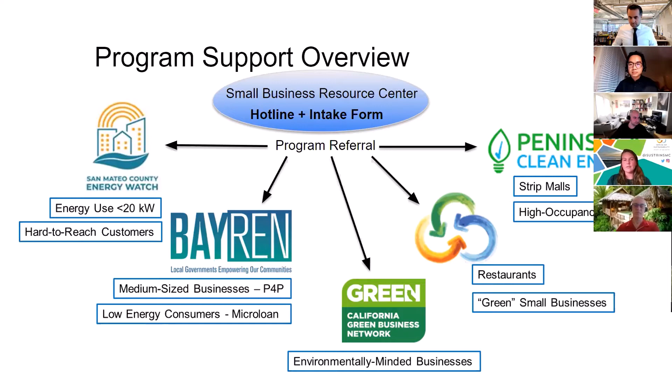Next slide, please. The first program I'm going to touch on today is San Mateo County Energy Watch, which is the program that I personally am managing currently. I coordinate this referral-based program connecting businesses with contractors, technical and financial assistance to work on energy efficiency and electrification measures. Specifically, our program is able to provide benchmarking and energy rate analyses, looking at the customer's current energy uses and seeing how we can improve upon them, whether through a remodel, installation of new equipment, replacement on burnout, or even planning for future construction.

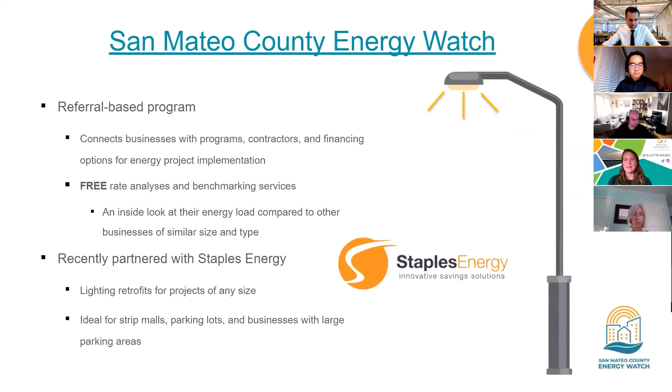In addition to this, we've partnered with many programs, one of which being Staples Energy. So if you're looking for lighting measure support specifically, this is a really great option. In many cases, think strip malls or other areas that have large energy consumption from light bulbs, especially those that are not efficient. Staples is a great partner here. Next slide, please.

Second, we have our Green Business Program. This is a much more holistic look at a business. They are able to work with small businesses throughout all categories of sustainability, through water, waste reduction, energy efficiency, etc. So what they're able to provide is consultation services for businesses who are looking to become more green and who have that green ethos at heart. If you know of a business or you're working with a business currently, or maybe looking for new construction for a business, this is really the best program for you, I believe, because they're able to look at the whole business as opposed to just one component.

Right now, they're also able to offer a few incentives. We are also working on a water incentive, which is very exciting, but not quite finalized yet, so unfortunately I can't announce or confirm that officially. But regardless, you are able to get businesses certified through the Shop Green app, which is really desirable right now, especially as businesses are trying to come back into the ring. After the past year, a lot of small and medium businesses have faced economic hardship, so this is a great way to get free marketing in addition to reducing their green footprint.

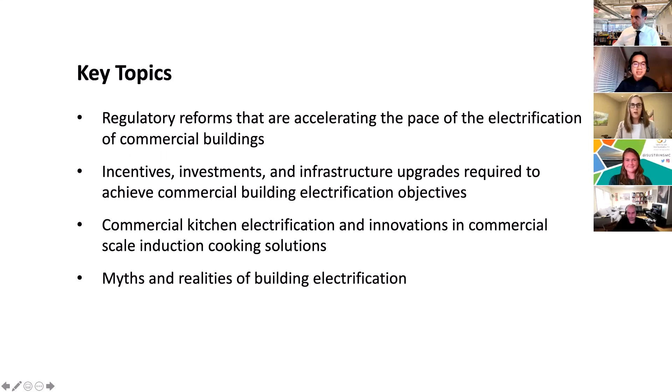So first, a little bit more about BDC. Kenny mentioned the Building Decarbonization Coalition is a diverse coalition of about 300 stakeholders, including builders, designers, manufacturers, local governments, state governments, NGOs, community-based organizations, all working together as a coalition to chart a safe, rapid, and equitable transition away from the use of fossil fuels in buildings.

And we use a 5-pronged strategy, which is really focused on stopping gas subsidies, phasing out the use of gas in all buildings, phasing out the sale of gas appliances, investing heavily in equitable electrification, and then decommissioning gas infrastructure and reinvesting those investment dollars into ensuring a just transition for impacted workers.

And a little bit about me, a little bit of real talk. I've been working in the climate field for about 30 years, as Kenny mentioned in his generous introduction.

I started off in the utility regulatory space in California, moved over to the international space and designed renewable energy off-grid systems, came back and went hyper-local and worked for a city and then worked across cities. So I consider myself a pretty climate-educated person.

This is my roof. This is my son plugging in our EV. We have weatherized our home. We've installed highly efficient windows and doors, smart technologies, and I'm a proud dark green member of Clean Power SF here in San Francisco. But here's where the real talk comes in.

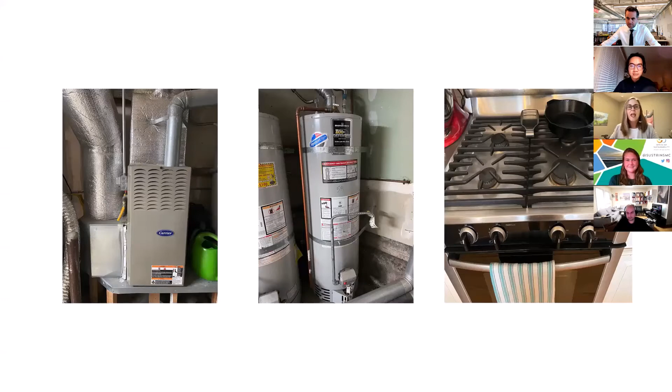This is my furnace, this is my water heater, and this is my stove, all gas. And I tell you that not to publicly shame myself, but I really think that I'm like a lot of the general public out there that either hasn't known about the significant climate, health, and safety issues associated with natural gas, or wanted to change out of my dirty appliances into clean ones, but either couldn't afford to or had other competing economic priorities, or like me, has really felt kind of stuck with my old, dirty, inefficient gas technologies, and I haven't really wanted to deal with the hassle of replacing them.

So we are going to talk about why it's important to convince people and to make it convenient and easy and affordable for them to do exactly what I am just about to do. So that picture is going to hopefully look very different in about 6 months.

So what we're finding now with all of our work to get rid of coal plants and to reduce emissions from vehicles, is that emissions from natural gas is now the fastest growing climate pollutant in the world. Burning natural gas in commercial and residential buildings accounts for more than 10% of US emissions.

And the term natural gas, I want to address that really quickly. It's the result of a 1930s gas industry marketing campaign. It's a pretty amazing campaign, really, to give the impression that their product was cleaner than fossil fuels, but it's very much a fossil fuel.

And the United States is the largest consumer of natural gas in the world. We're ahead of Russia, we're well ahead of China. Natural gas is extracted all over the United States. The US is the second largest exporter of natural gas in the world behind Russia. And natural gas is produced in 32 states, mostly in Texas, Oklahoma, New Mexico. And California is the second largest consumer of natural gas in the country, second only to Texas. Two-thirds of our households use natural gas for home heating and cooking.

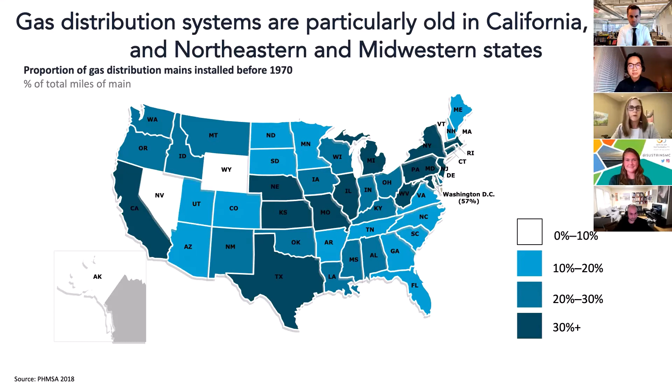Now, in California, many of our communities, as you well know, I'm sure, rank the highest in the United States in terms of poor air quality. And that's during normal times, not even during wildfires. And we're seeing that while we're making good progress on power plants, reducing emissions from power plants, and reducing smog-causing pollution from vehicles, we're way behind on buildings.

The current state of air quality problems in California is that the gas we are producing in buildings is producing 6 to 7 times more smog-causing pollution than power plants, and twice as much as all of the cars that are on the road driving around the state.

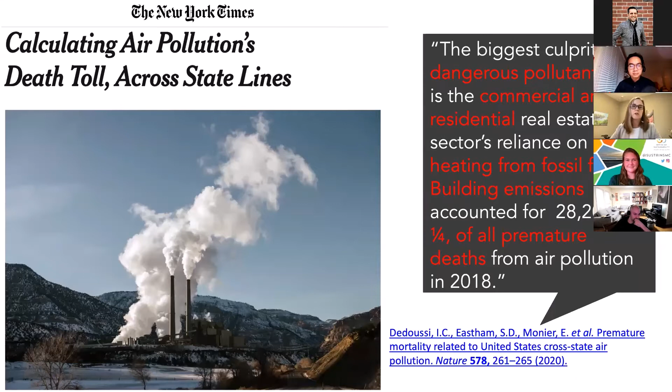We're seeing this around the country. This is from a New York Times article about a study released in 2020 on the biggest culprits of premature death from air pollution. What they found was that the largest source of premature death from air pollution is now burning fossil fuels for heating in buildings. A quarter of all premature deaths from air pollution comes from emissions from the gas we're burning in buildings.

When you burn gas, you release some pretty serious, dangerous toxins. The three main ones are nitrogen oxides (NOx), carbon monoxide, and formaldehyde. Nitrogen oxides are the main concern, and the federal EPA has tried to reduce NOx for many years because they're so damaging—they decrease lung function and cause respiratory problems like asthma, especially in children. Carbon monoxide is deadly; that's why we're required to put carbon monoxide sensors in all our homes, yet it's coming out of our kitchens. Formaldehyde is one of the leading causes of childhood leukemia and other cancers.

This is what happens when we cook with gas in our kitchens. A study done by Lawrence Berkeley National Labs in 2014 examined 60,000 homes in California and found that in half of those homes, within 2 minutes of a gas burning stove being on, they exceeded the 1-hour federal legal limit of exposure to these pollutants.

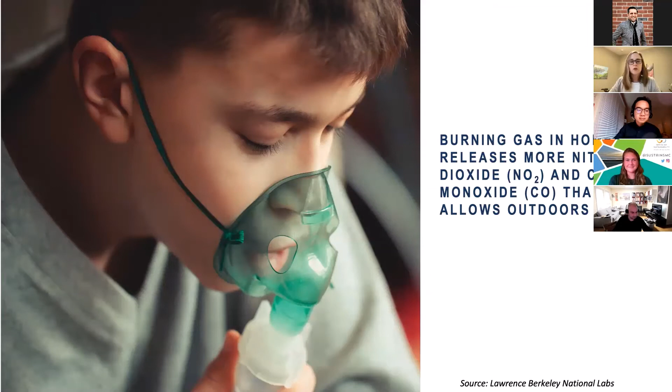A similar study was done more recently by the Climate Council in Australia, which found earlier this year that a child living with gas cooking in the home faces a comparable risk of asthma to a child living with secondhand smoke in the home. Households that cook with gas were 32% more likely to develop asthma than those without gas cooktops. This has a profound impact on childhood and family health, and also on inequities and injustice, because we know higher pollution levels are usually found in older, smaller, less ventilated homes—typically found in lower income and BIPOC households and communities.

So let's talk a little about the cost of gas. Climate policies are already starting to drive a drop in gas demand—it's slow, but we're starting to see it. We know that gas infrastructure financing works by having gas utilities and pipeline companies put the infrastructure in the ground, and then we as ratepayers pay for it. So there are fixed costs being allocated to all of us as ratepayers.

As more buildings are electrified and there's less demand for gas, there will be fewer customers left on the gas system to pay for those fixed costs, or stranded assets—leading to higher gas rates. As we deal with aging gas infrastructure to avoid things like the explosion in San Bruno, increased safety regulations also lead to additional higher gas costs. Those higher rates make electrification even more economically attractive, and more people choose to get off the gas system and onto electric, which leads to even less gas demand, higher prices, and so on.

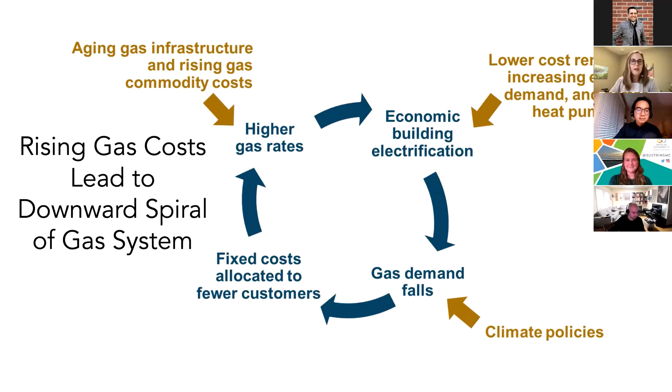This slide shows the average costs that we've gotten from filings at the California Public Utilities Commission of piping gas infrastructure to the home, plumbing that gas around the home, and then installing the ventilation systems to get the pollutants out and into the atmosphere. And so it's about an average of $7,000 per home to install gas infrastructure in a new home.

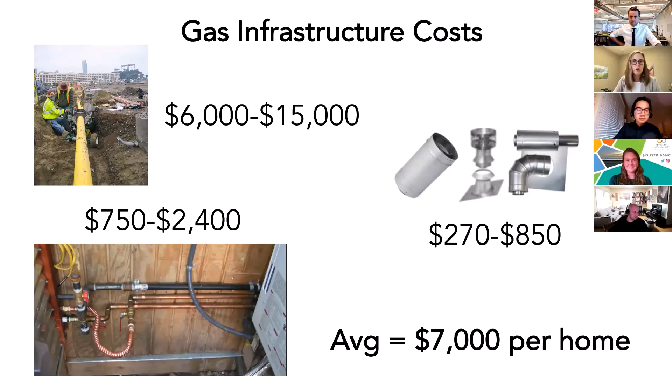And the National Association of Home Builders puts out a report every year that looks at the impact of every $1,000 of increased cost that we spend to build housing across every major metropolitan area in the country, and how many families that prices out of the ability to afford a home within that jurisdiction. In 2020, they found that for every $1,000 of increase in housing costs, you price out 160,000 average households from being able to afford to purchase that home.

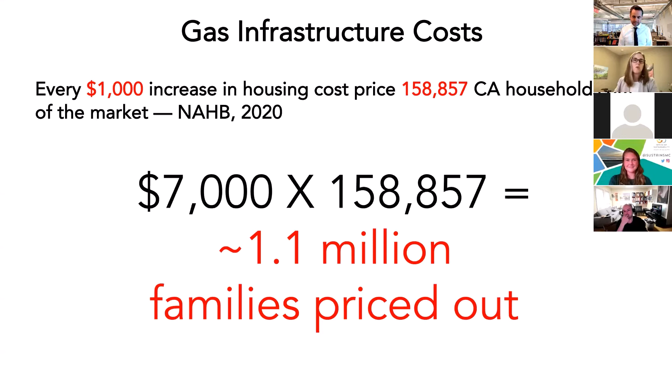So if you take their numbers at the low end of what it costs to put gas infrastructure into a new home, about $7,000 per new home, that's more than 1 million families that are being priced out of being able to afford that home because of the choice to build that home with gas.

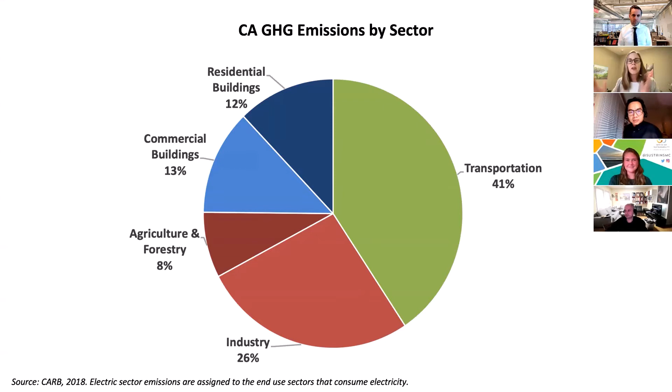So what do we do about it? Commercial buildings comprise 13% of California's emissions footprint. The state, as you know, is putting in a lot of policies and incentives to reduce transportation emissions. We don't yet have a lot of great technological options for decarbonizing industry and agriculture, so we may need to preserve our remaining fossil fuels for those sectors, but we have excellent technologies available to us today that we can use to decarbonize buildings. So we do have technologies available that can help us electrify all of these end uses. I'm going to focus today on the big ones: space heating, water heating, and cooking.

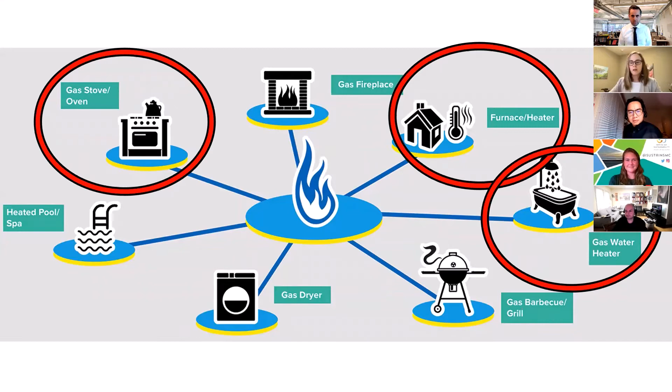So here are some of the barriers to electrification. You know this because you're talking to your clients and your customers about why they should electrify. And here's probably what you're perceiving and what they're saying back to you. Space and water heating are responsible for about 70% of direct fuel use in commercial buildings. So those are the big ones. The rest is cooking and other uses.

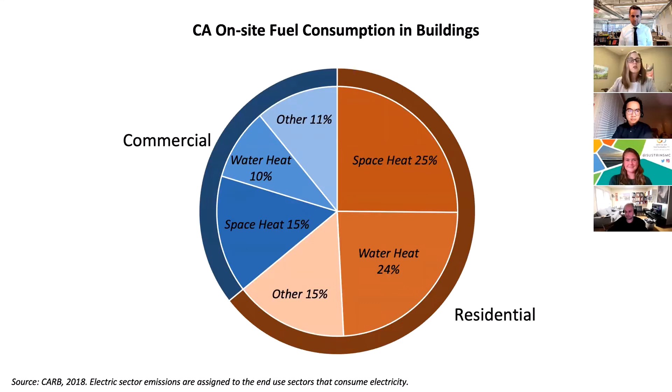93% of commercial buildings use non-electric heating fuel. It's the primary source of emissions for those uses in commercial buildings. And while emissions from fuel combustion in residential buildings in California fell 18% between 2000 and 2016, combustion emissions in commercial buildings actually rose 9%. So we have to deal with this.

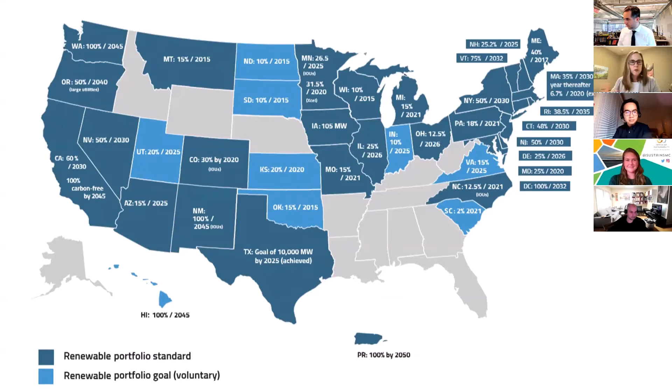And so here is where we're starting to see an increasing amount of renewable electricity from on the grid in these states. The darker the state, the higher the level of commitment. As you know, California has committed to the most aggressive renewable portfolio standard, 100% by 2045. Washington State is the same. And the lighter blue states are lower commitments, but they're still starting the process of moving toward a cleaner grid.

Many of you are already designing for this equipment in your buildings and projects, and some of you are engineers who know this technology better than I do, but let's talk quickly about how a heat pump operates.

It operates much the same way as a refrigerator, just in reverse. It uses a compressor with a refrigerant and transfers heat from one location to another. In a refrigerator, it transfers heat from the air inside to the outside. If you put your hand on the back of your refrigerator where the coils are, you'll feel the heat. That heat used to be inside, and the heat pump is taking it outside.

The same can be done to heat and cool air and water. A heat pump water heater, even in below freezing temperatures, can still extract heat from the air outside the tank of water and bring it into a heat pump space heater or water heater. This can be done in a unitary system like in your home, or in a centralized system like in an office building.

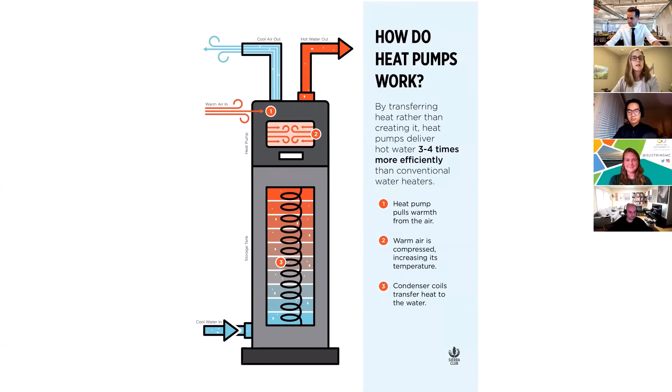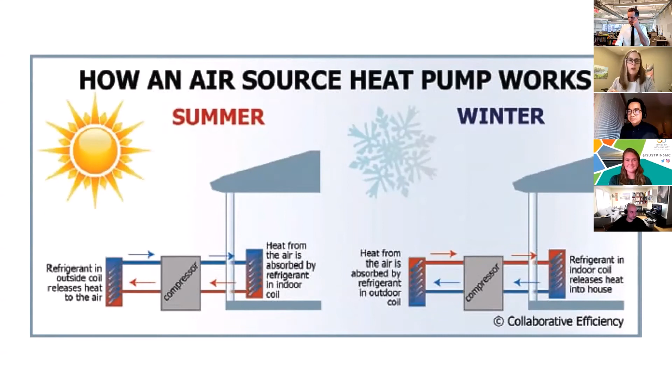The same technology can be used in reverse—it's basically an air conditioner that can run in both directions. Modern designers are really starting to look at heat pumps as the high-tech systems, the future of what heating and cooling should look like in buildings, and our traditional AC systems as old, kind of Soviet-era systems that are becoming outdated and will be obsolete.

These systems are incredibly efficient. The beauty of a heat pump is that you're not using a whole lot of energy to actually produce heat—you're just moving it from one place to another, and that's why it's so efficient.

When you look at 1 therm of input from a natural gas boiler, you get 0.8 therms of heating. At the bottom of the screen, you see what you can get when you put in 1 kilowatt hour of input into a heat pump—you can get 3 to 4.5 kilowatt hours of heating. You're not actually producing the heat, you're pulling heat from one area to another, which is why you hear people talking about heat pumps being 300 to 400% efficient. You only use electricity to move heat in the compressor and potentially to run a fan as well.

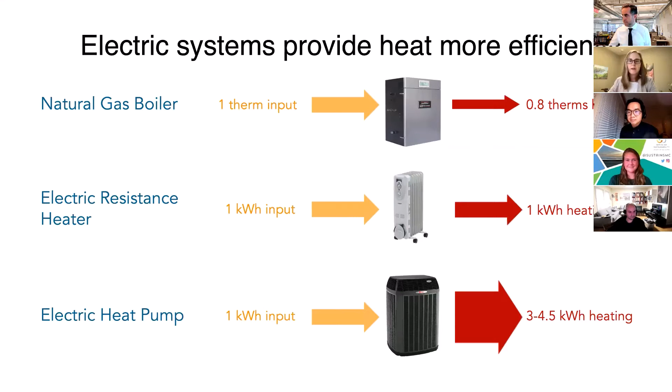RMI did a study of the greenhouse gas impact of switching water and space heating from gas to heat pumps, looking at the average grid mix across the US. They looked at every state, from West Virginia, which is still about 95% coal, to much cleaner states like New York, Maine, and California. What they found was that in every single state, even ones with a dirty electricity mix, there is a greenhouse gas benefit of switching space and water heating to heat pumps rather than running them off natural gas. The darker the blue, the bigger the greenhouse gas benefit.

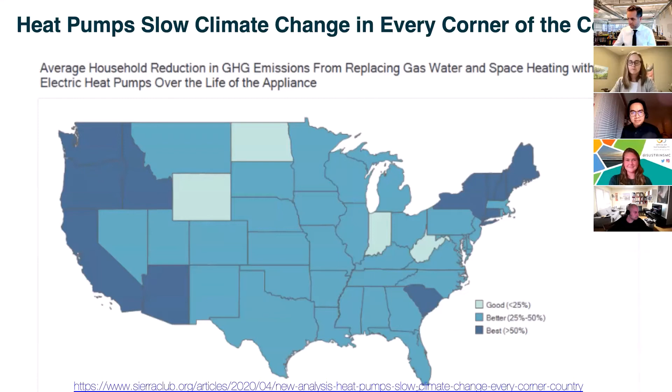In the Northwest, West, and Southwest, you get about a 50% greenhouse gas benefit from switching away from natural gas. But even in dirtier states, like West Virginia, you get a 25% greenhouse gas benefit from switching. Because of this incredible efficiency, even with a dirty electric grid, you still get a greenhouse gas benefit—not to mention an almost complete elimination of nitrogen oxides from your heating.

While space and water heating require the most energy and therefore have the biggest greenhouse gas reduction potential, people generally don't care about their hot water and cold or hot air. They don't care where it comes from as long as it works. But people care very deeply about their stoves, so we're going to talk about induction cooking.

Induction cooking isn't like the traditional electric coil systems you may think of, where you're heating up an electric resistance coil and that coil heats the pan itself. What magnetic induction cooking does is use electromagnetic fields to excite the molecules within the pot itself, and that generates the heat within the pot.

So induction is incredibly efficient. The transfer of energy is about 90% efficient because it doesn't generate any waste heat that goes to the outside of the pot or pan. A best-in-class gas stove gets you about 30% efficiency.

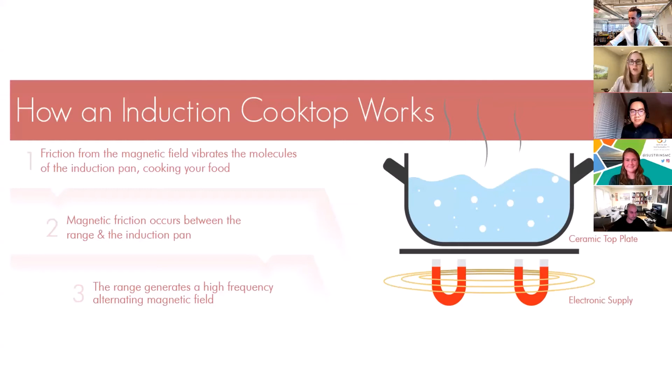It's a massive differential, because 70% of the heat being generated is escaping into the surrounding air. That not only wastes heat and causes more emissions, but also heats up the air in your kitchen. You've heard the expression, if you can't stand the heat, get out of the kitchen—with an induction stove, that expression is no longer valid. In fact, in induction kitchens you sometimes have to heat the kitchen in winter months in cold places because you don't get the heat coming off the stove. That's one of the things professional chefs love about induction cooking—their kitchen is much more comfortable to cook in.

So not only that, it's a better cooking experience. The Sacramento Municipal Utility District, SMUD, did a study with the Food Service Technology Center in San Ramon, and they looked at the two most important aspects of cooking for chefs: power and control. They want to be able to heat up something quickly, and they want to have ultimate control of the food they're cooking. They compared 3 different kinds of induction stoves with 2 electric resistance stoves and 1 top-of-the-line gas stove. The 3 induction stoves are the red lines, the 2 electric resistance stoves are the green lines, and the 1 gas stove is the blue line.

What this chart shows is how long it took to boil about 12 pounds of water, which is about enough to cook pasta for a family of 4. You can see that the 3 induction stoves very quickly got water to the boiling point, anywhere from 9 to 11 minutes. The electric resistance stoves took about 15 to 17 minutes, and the gas stove about 18 to 19 minutes. So both the electric coil and the gas stoves took about twice as long as the induction stove.

You can see that the control of the induction stove is so amazing that you can quickly get that water back down as well, which is important for chefs. So what this is showing you is that induction cooking is about 2 times more powerful, and it gives you about 3 times as much control over how easily you can cook the food.

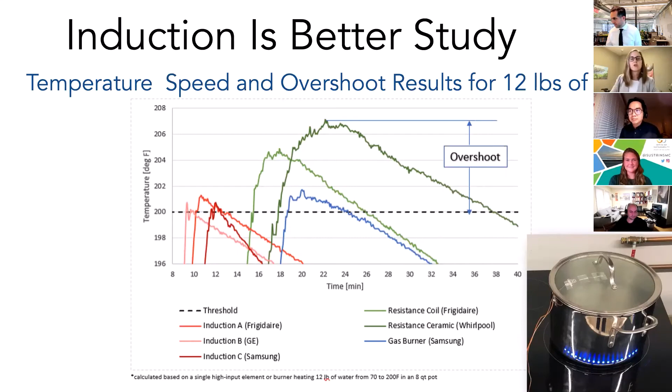Finally, induction is healthier because you're not having any pollution coming off of it, and it's also safer. It's cooled to the touch almost immediately after you cook with it, and so burns are quite rare.

Folks that love induction stoves: Consumer Reports loves induction stoves. In 2020, 6 of their top 8 ranges were induction. And in addition to the power and control, they cited the durability and the ease of cleaning. For those of you that have a gas stove, you know that to clean it, you have to take the grill off, you have to pull the food off, you have to scrub it, you have to put the grills back on. But with induction, all you have to do is spray and wipe the glass surface.

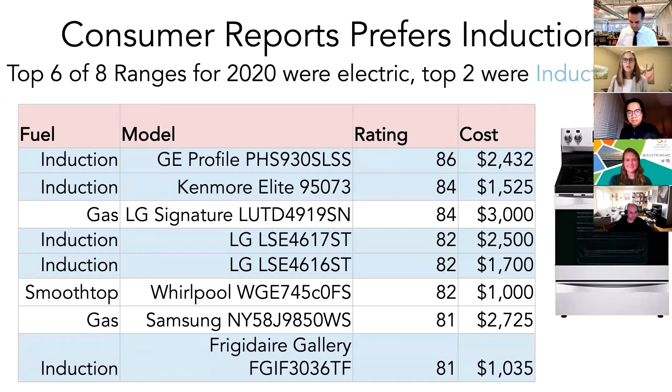More and more high-end restaurants are starting to renovate their kitchens to be all electric, from the French Laundry to Café Ficelle, which has represented the United States in the French baking competition for the last 5 years, to Wolfgang Puck, to Guy Fieri. They're all huge fans of induction. And even the Great British Bake Off, which is my personal favorite TV show, loves induction because of its modularity and its portability. You can buy a portable induction hob for about $100, and you just plug it into any 120 volt, 15 amp electrical outlet.

So I would like to show, if technology allows me, a little bit of a video so you can hear straight from a chef. Let's see if this works.

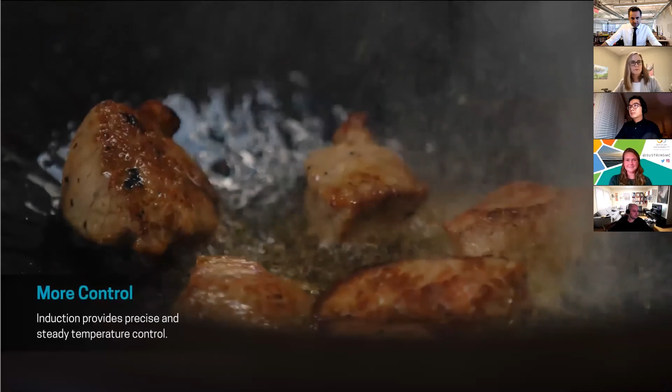I'm gonna saute that with garlic. Turn this on. When cooking with the wok, it's usually over an open flame to create that nice sear, the high heat. But with the induction burner, I was able to set up to the temperature that I want within seconds, and the wok just heat up. That, I was really impressed with. And you see that ready to go, then you just carefully add the meat to sear it. Steak cooks at really high heat, so knowing that I can control the exact temperature and seeing the results, I look at the wok now and I'm like, I wouldn't mind having this at home. The garlic is caramelized. The meat has a nice color. I'll add the onions.

When we're sauteing veggies, you want to stir constantly. Once you see that the vegetable is kind of wilting, that's when you know it's done. That was what, 2-3 minutes, and you have complete lunch or dinner. So now I'll just turn this off, and instantly you can hear it stop cooking. So yeah.

When I was young, I spent a lot of time with my mom in the kitchen. She's been the biggest influence in what I do. I would call her... okay, sorry about that.

So you can see that chefs really like it. There are ways to cook with different styles of food. These are a couple resources that are available, some really great resources. The Food Service Technology Center, especially, offers an induction demonstration program that will demo commercial and residential induction equipment live or virtually for you if you're a developer, architect, builder, etc. They offer great classes. I strongly encourage you to look at those.

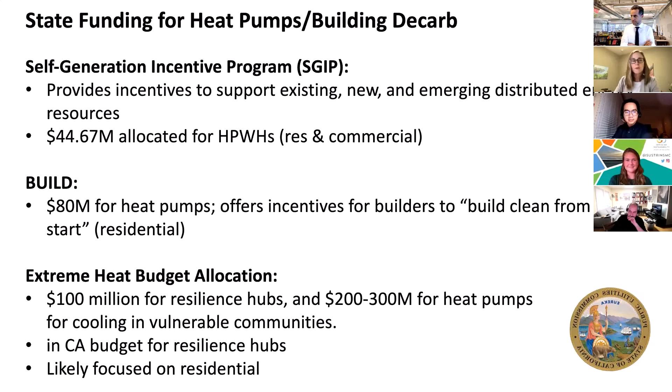Wanted to mention also the new budget that the governor is expected to announce on January 10th includes about $500 million to address extreme heat. We're starting to see this more and more across states and across the country, where people are really suffering because they don't have air conditioning, because they've never needed air conditioning, and now we do need it. So there's a lot of money in the new budget for heat pumps for cooling in vulnerable communities. If it passes, it'll be the largest heat pump incentive program in the country.

So I'm going to end with a couple of building decarbonization myths, realities, and somewhere in between.

Heat pumps don't work in cold climates. This is not true. It is true that early technologies rely on a simple vapor compression cycle and do not perform well under freezing temperatures. But newer products have variable speed compressors, and therefore are pretty capable of performing well below -10 degrees Fahrenheit. This has been tested in Minnesota and other pretty extreme cold climates.

We know that induction is not the same as electric resistance, although a lot of people think it is. Induction doesn't work well with woks - but we just saw that it works quite well, and you can use it for charring peppers and tortillas. There's all kinds of ways you can use it.

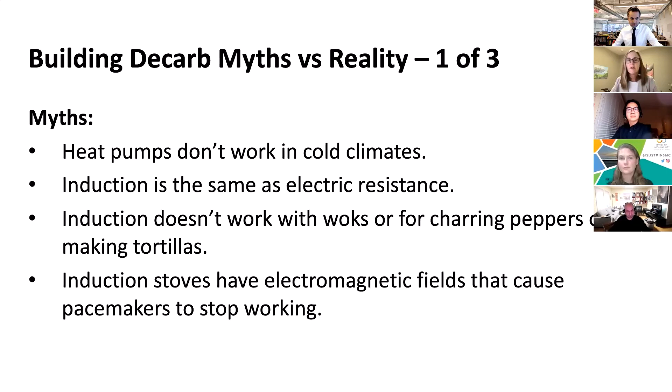And finally, induction stoves do have magnetic fields. They won't cause your pacemaker to stop working. They do have magnetic fields, but they're only up to about 3 inches above the cooktop. So as long as you're not laying on your stove, then you should be fine.

There are some real concerns though. Heat pump water heaters do require access to a sufficient volume of air, which means they must either be installed in a large enough room or ducted to the outside. Electric equipment could require an electrical panel upgrade, and in fact, in many cases, we see that it does. This is not a concern for new construction, but for existing buildings, it's probably the biggest challenge we face in decarbonizing buildings.

And finally, induction stoves do actually require, in many cases, new pots and pans. So if you can stick a magnet onto your pot or pan, it will work. Copper doesn't work, glass doesn't work, but steel and iron do work.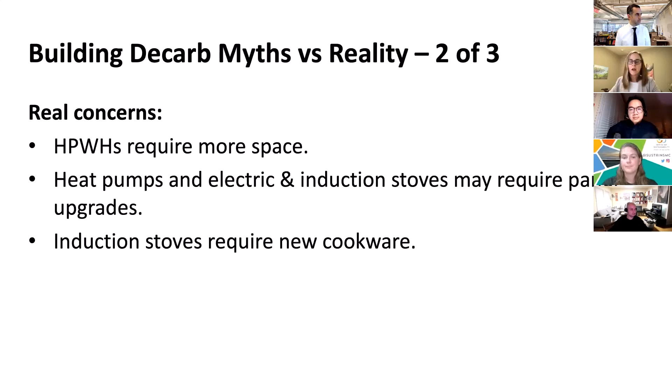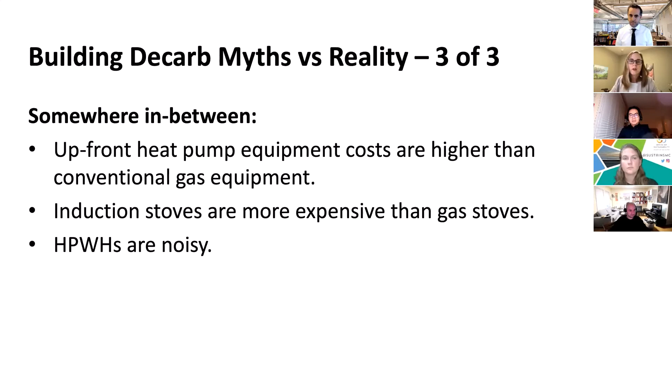Induction stoves do tend to be more expensive than lower end gas stoves, but much cheaper than higher end gas ranges. A really good 30-inch 4-top Miele induction stove costs about $3,000, whereas the equivalent quality Viking gas stove costs upwards of $6,000. And finally, heat pump water heaters are perceived as being noisy, but really they only make about as much noise as a refrigerator.

So with that, I shall end. We really seek to help the design and construction community and local jurisdictions navigate this building decarbonization path. We provide monthly policy calls and regulatory developments, and we can connect you with technical resources.